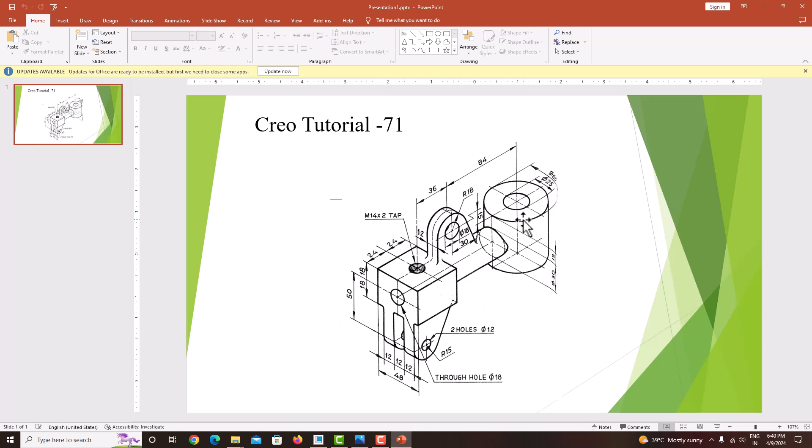After modeling this model in Creo Parametric, the model will look like this. Here you can see this is the final model of our geometry. Now we'll learn how to model this component step by step in Creo Parametric.

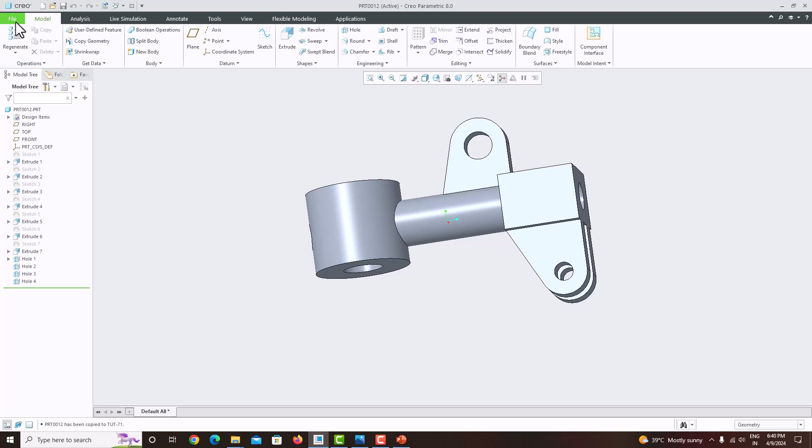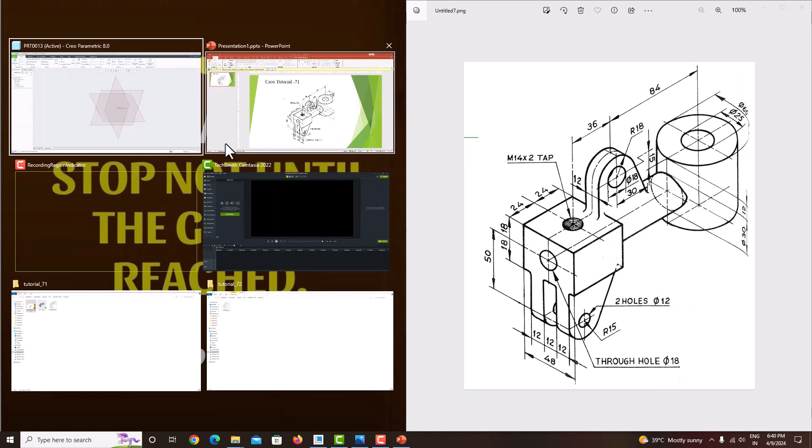Just go to the file, close, go to new, part, solid, provide a name, untick this use default template, OK. Our units are in mm, choose the part solid absolute, OK. Choose here all the planes on. For easy explanation, I'm just keeping the figure on this side and the software on the right side.

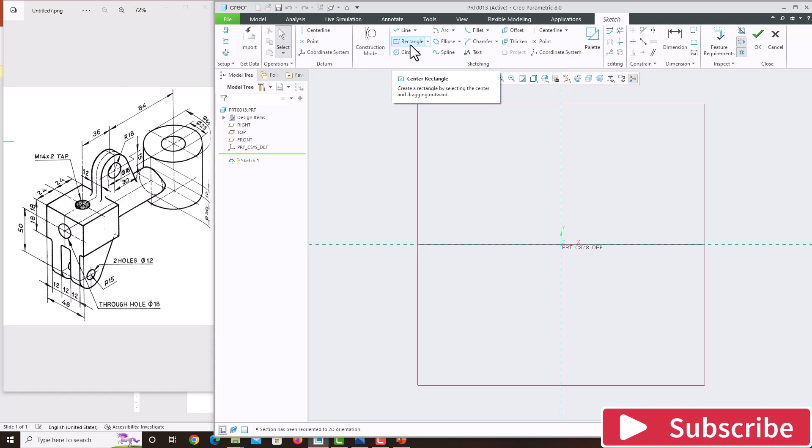Now we'll model the component like this. First we'll start with this. Choosing the front plane, sketch view. Now take the rectangle, center rectangle, the height is 36 and the width is

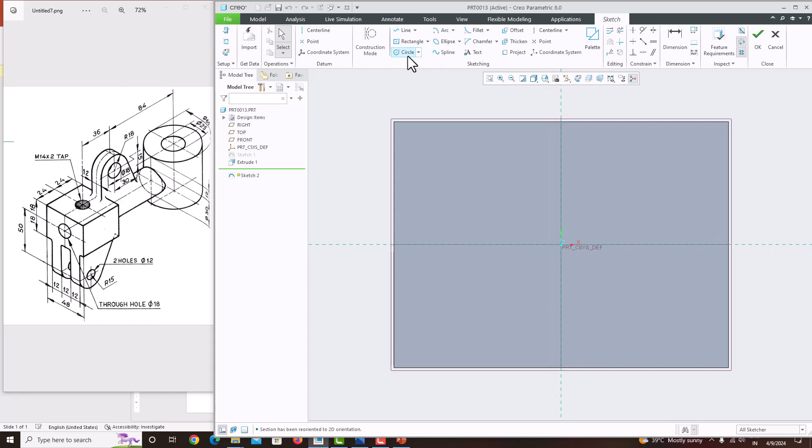48. Go to the fit screen, just say OK, then extrude, change the direction, the extrusion length also be 48, OK. Then we have created this, then we'll create this cylinder with a diameter of 30, select this surface, sketch view, circle with a diameter of 30,

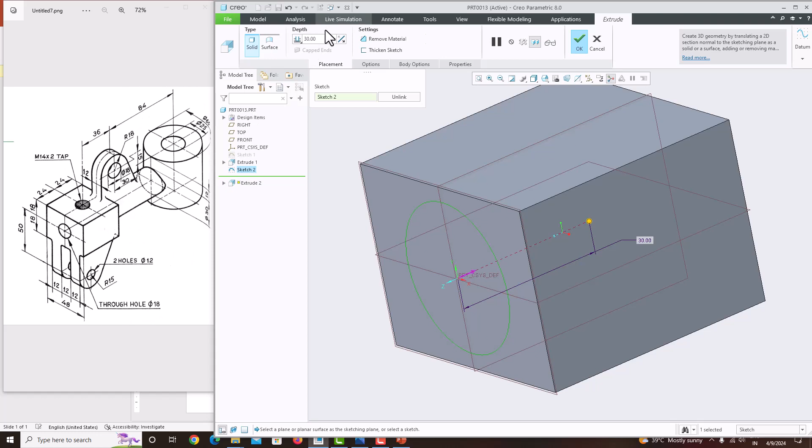then OK, extrude, change the direction, switch off this material removal. The extrusion total length is 84 plus 36 plus 24. Just OK. Now we have created this cylinder. Then we'll create this cylinder.

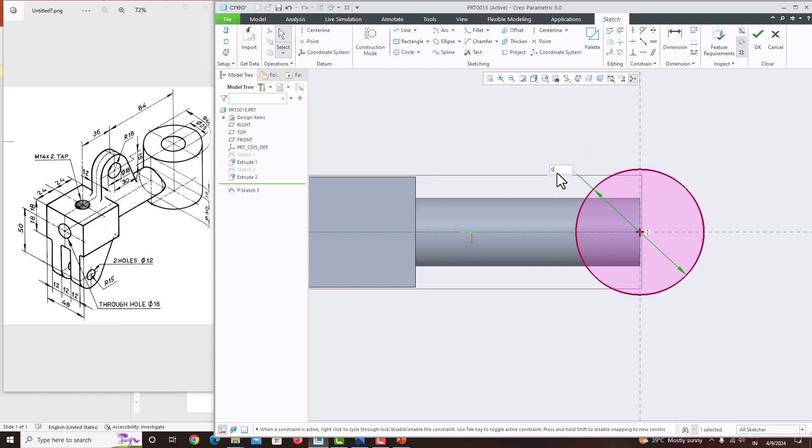For that, select this midplane, sketch view. Now take the reference of this edge, then close it. Take a circle. The outside diameter of the circle is 60. Just say OK. Extrude. Go to the options.

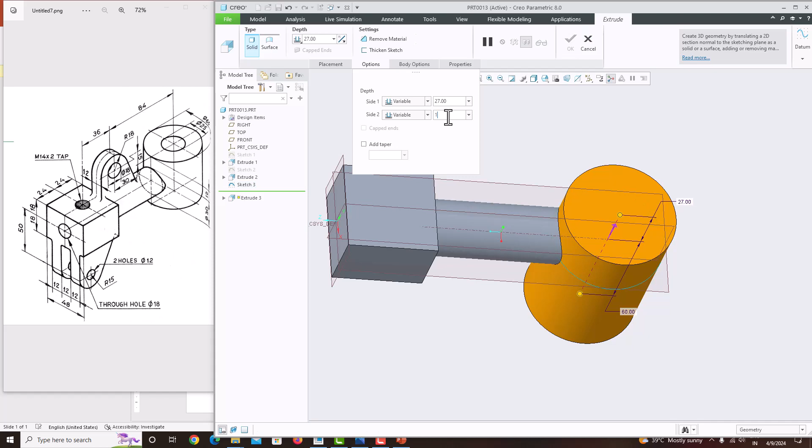Here they have specified from the center to here it is a radius of 15 plus this edge to this edge they are given 12. And bottom it is 15 plus 10. So this side, one side is 15 plus 12. Another side is variable, it is 15 plus 10. Just say OK. Now we have created this cylinder.

Then we'll create this feature. For that, select this midplane, sketch view. Now take a circle. Here it is straight. So put a circle and make a tangent connection. Here they have given radius. Go to dimension. It has the radius of 15. And from the center point to the center point of the circle is 50.

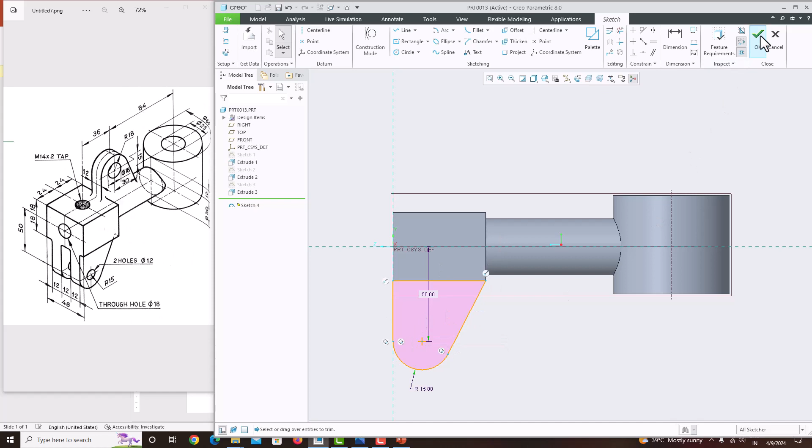Now take a line again. Just connect it here, just connect it here and make a tangent connection. Now remove the unwanted edges by using delete segments. This is our final sketch. Just say OK, extrude, make it symmetric. The extrusion length is 36. Press OK.

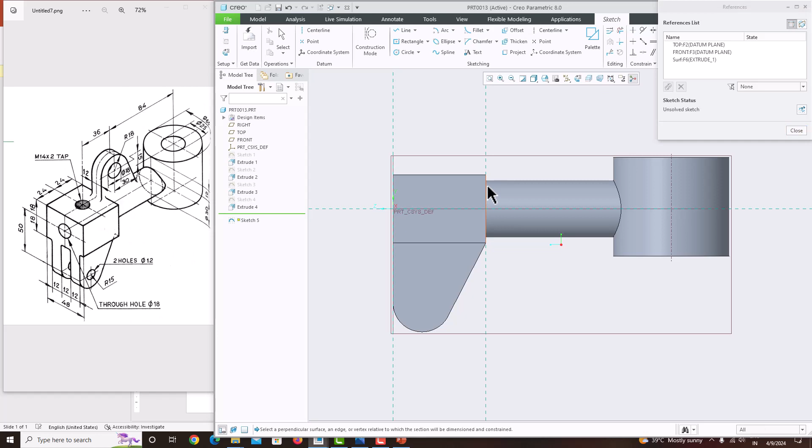Then take the midplane, sketch view, take the reference of this one and close it. Now take a circle. We just put a circle somewhere here.

Now see, the circle radius is 18. The radius is 18, and this total height they have not given. Instead they have given, from the center point, this height is 15. From this point to this edge the height is 15, from this center point it is 36, and from this point to this edge is 24. So the dimension from this point to this point is 36 plus 24.

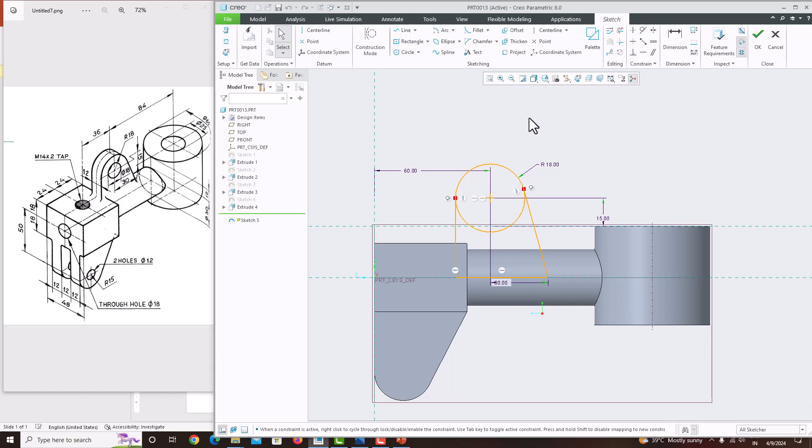Now just put a connection, take a line here to this point, and somewhere from here make a tangent connection. Now here you can see from the center point to this edge, it is the dimension of 30. Go to dimension, from here to this point, it is 30. Now all the dimensions are provided. Just say OK. Now just go to the edit. Remove the unwanted edges by using delete segments. Just say OK.

Extrude. Symmetric. The thickness is 12. Just say OK. Then here we have an axis, but here and here we don't have an axis. That is because for a full circle it will automatically generate the axis. For a half circle it will not generate the axis. To get the axis,

just go to the sketch, edit, put the datum point here, say OK. Now we will get an axis here. Similarly here, go to edit, sketch, put the datum point here, just say OK. Based on the axis we can create a hole easily. Now we will create a hole here. Select the surface, sketch view. This one is the center point.

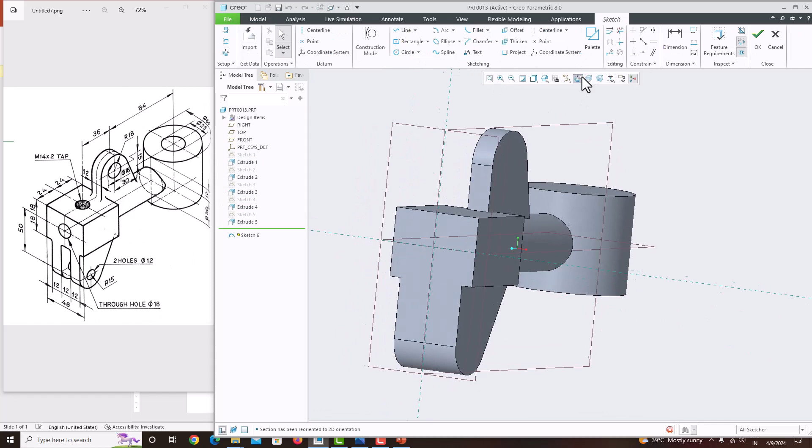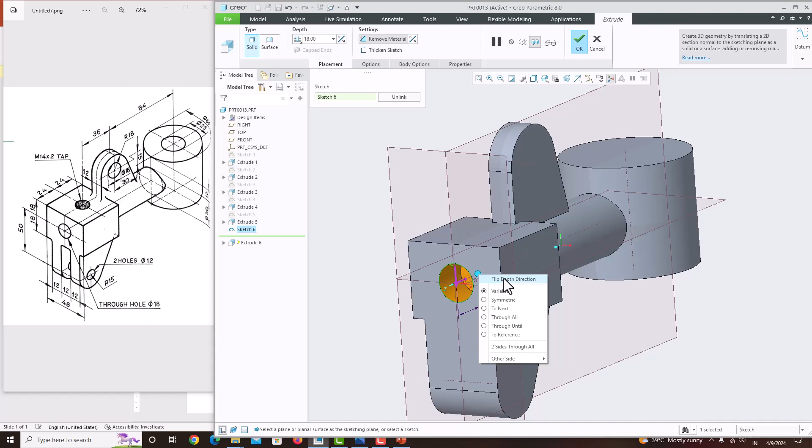Take the circle with a diameter of 18 and through hole. Its diameter is 18. Just say OK. Extrude. Long press the right click. You will get these options here. Make it through all. Press the roller to confirm.

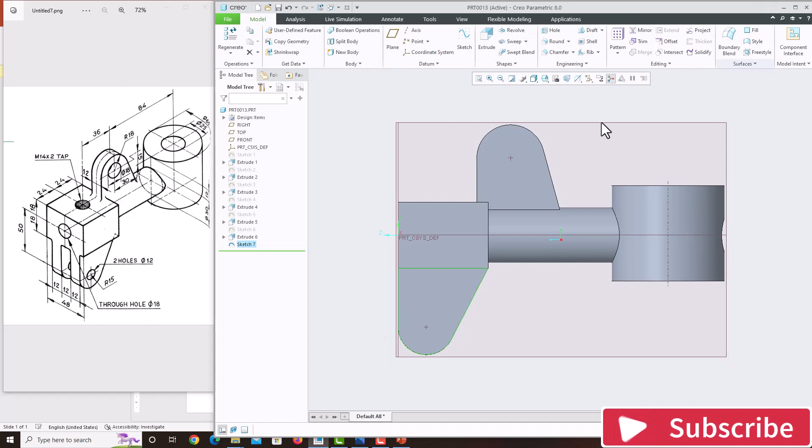Now we will make a cut here. For that, take the midplane, sketch view. Now use the projection tool. Project this line, and this line. Close, say OK. Now the sketch is projected here. Extrude. Make it symmetric. The cut is 12. Say OK.

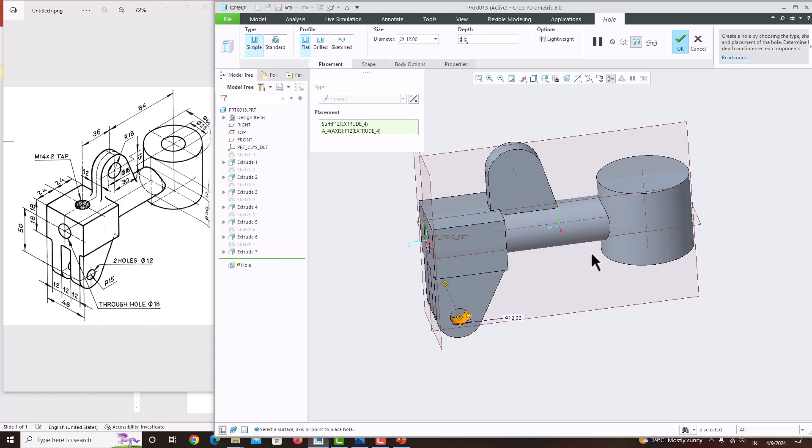Then we just want to make a hole here. For that, take the hole, select the surface, press and hold Ctrl, select this axis. The diameter of the hole is 12, and make it through all by pressing here, through all, just say OK. Then select the surface, sketch view. Here we just want to make a standard hole. For that, just close and cancel.

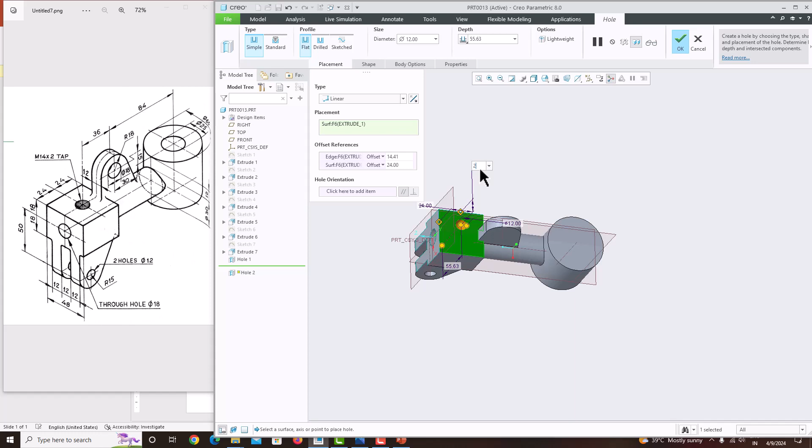Take the hole and place it on this surface. Then this tag you put on this surface, and this one you put on this surface. This dimension is 24, and this dimension is also 24. Now the diameter is M14. Further, just go to the standard. Thread type is ISO. Screw size is M14 x 2. This one you make it to next. Just say OK. It is a threaded hole.

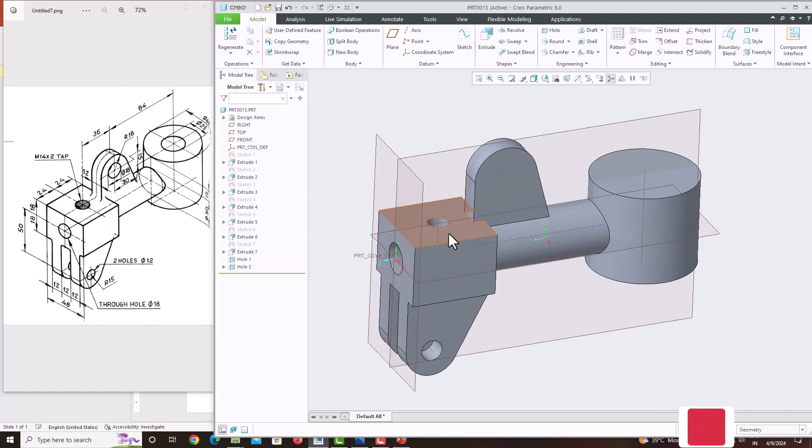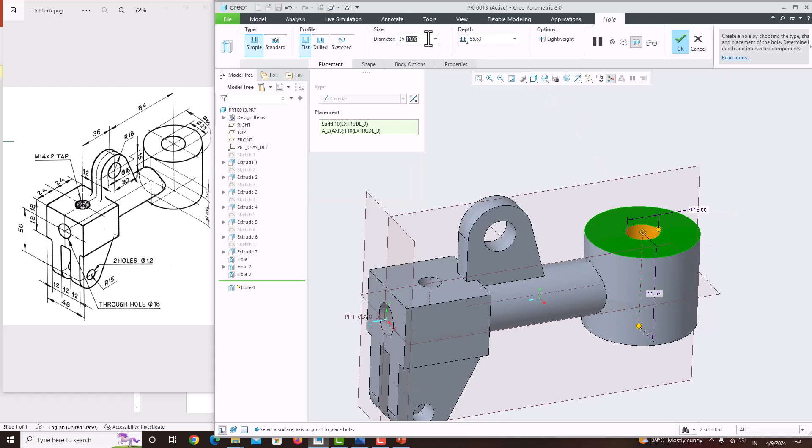Then we'll make a hole here. Just take this hole, place it on the surface, press Ctrl and select this axis. Now the diameter of the hole is 18. Make it to next. Say OK. Similarly here, select the hole, select the surface, press and hold Ctrl, select this axis. The diameter of the hole is 25, and this one you make it to next, or make it through all. Say OK.

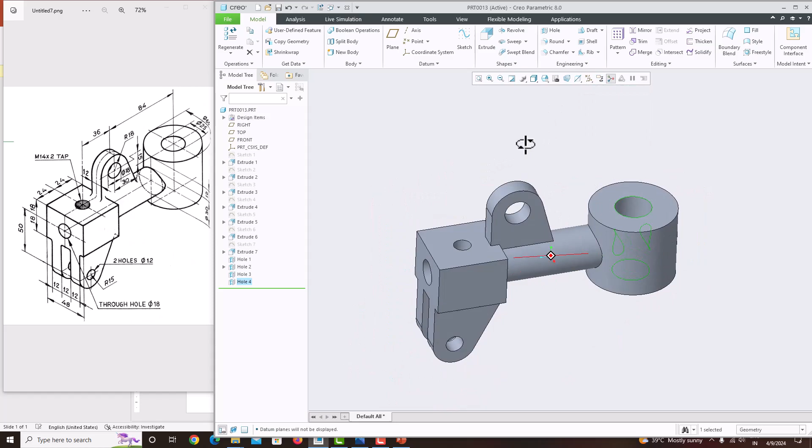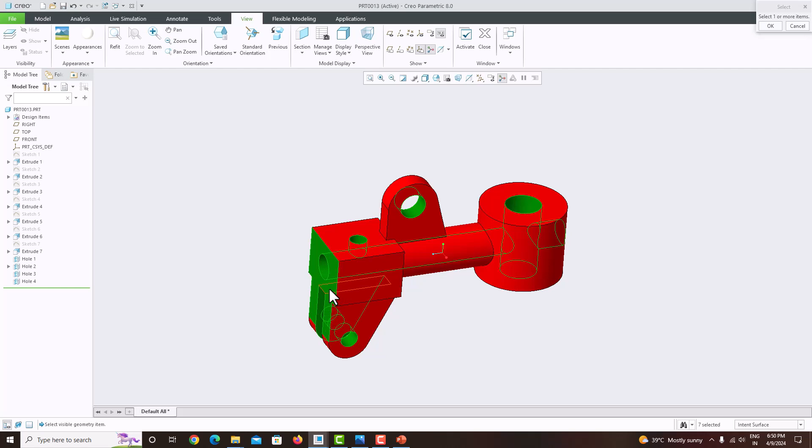Now the complete model is done. To change the appearance, just go to view, appearance, select any color and apply it to the part. Say OK. Then for the inner appearance, choose the intent surface, press Ctrl and select the surfaces. This one is not. Like that we can change the appearance. This is our model. In this tutorial we have learned how to model this component.